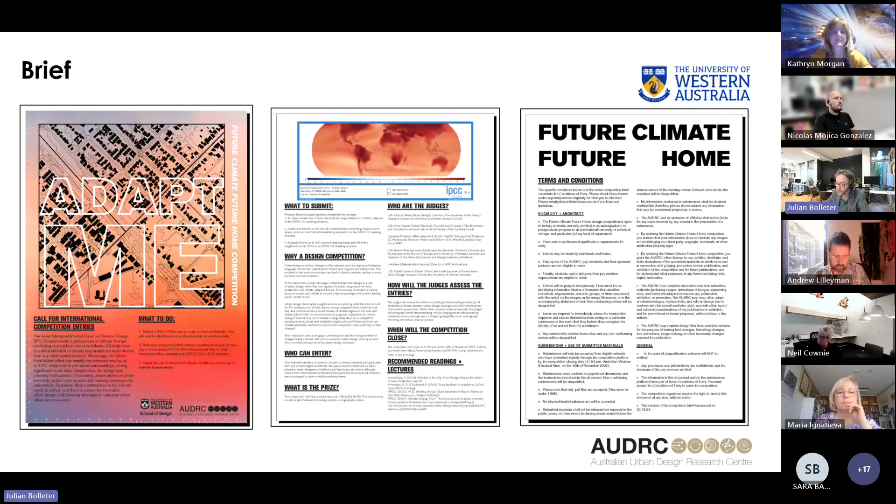So I will now walk you through the 10 commended entries, and then we will review the top 3 winning entries. The commended entries are in no particular order and will all receive a certificate.

Okay, so the first of the commended entries, congratulations to Francesca Montella, Maria Petrold, and Marco Santini from Italy and France for your commended entry. We know that topography can have major effects on urban climate, as cooler air tends to coalesce into lower-lying areas. With such thinking in mind, this novel and compelling entry proposed a constructed ravine carved into an urban space in Aix-en-Provence in France as part of a Mediterranean rewilding network. Congratulations to the team for their commended entry.

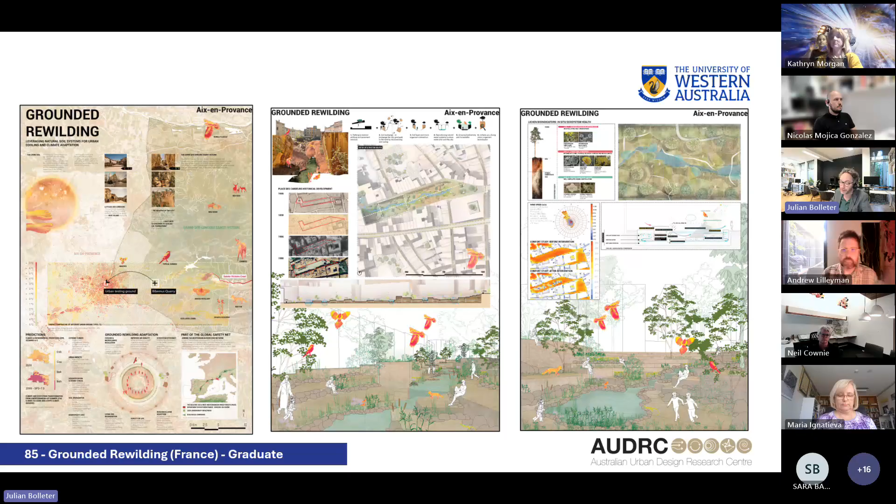Next is entry number 76, which concerns the Fahidi neighbourhood in Dubai, which was a student entry. There is much to be learnt from traditional Arabic Islamic urbanism about adaptation to extreme heat. This conscientious entry sought to adapt the Fahidi neighbourhood in Dubai through careful analysis of the existing condition and sensitively applied adaptation strategies such as blue-green corridors, shaded wind paths and cooling courtyards. Congratulations to Keith Vernon Castellina from India for your commended entry.

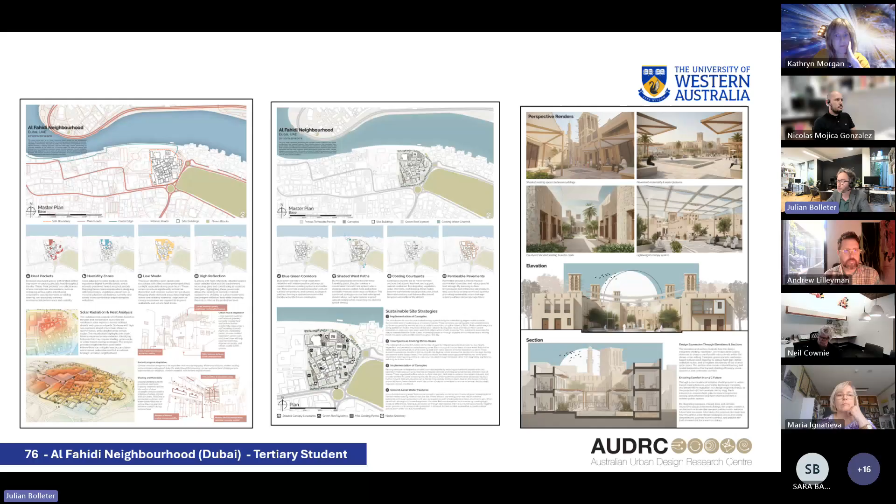Next was entry number 59, a graduate entry called Return of the Crows from Japan. Drawing on dystopian fiction, this evocative entry focused on the role of crows in seeding urban ruins with seeds to create an urban forest of epic proportions. The proposal reinterprets the role of crows to offer a radical new way of climate-adapted living in Kabukicho in Japan in 2099. Congratulations to Yutaro Takayuso, Daisuke Akadome, Mayuki Kondu, and Tukumi Murakami from Japan for your commended entry.

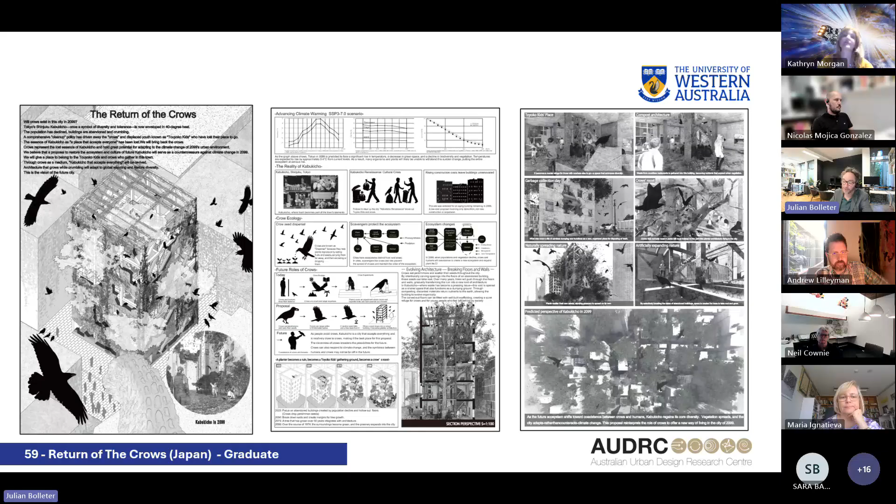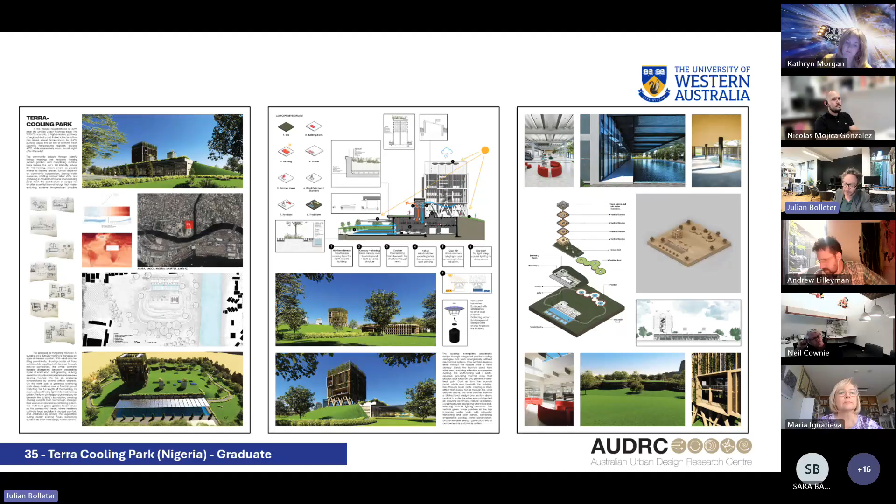Next, entry number 35 was about a Terra cooling park in Nigeria, a graduate entry. This elegant proposal for Lagos proposes a climate shelter within a park which stands as an oasis of thermal comfort within Lagos's suffocating urban heat island in 2099. The shelter features a prominent wind catcher which draws cooler air from outside while expelling hot interior air through natural convection. Congratulations to Mubarak Olawui from Nigeria for your commended entry.

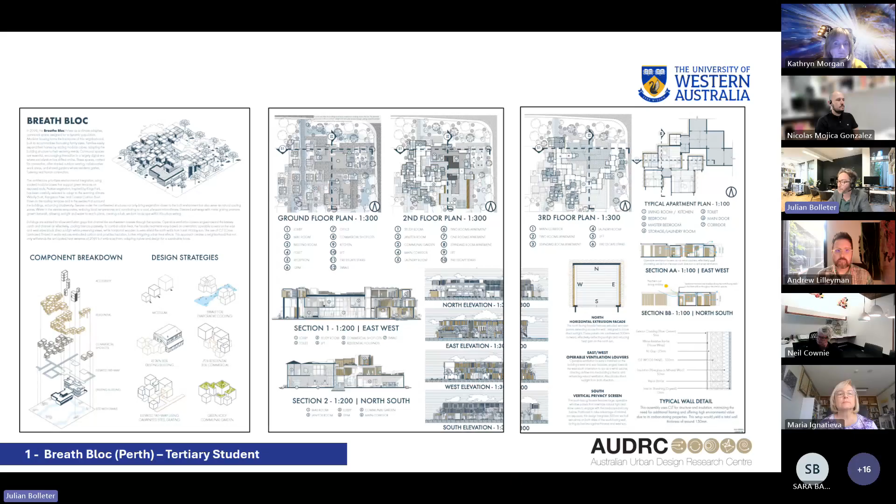Our next commended entry is called Breath Bloc, from Perth, Australia, a tertiary student entry. This extraordinarily detailed entry evokes the Breath Bloc, a climate-adapted community designed for a dynamic population. Modular housing forms the backbone of this neighbourhood and allows openings that channel the southwesterly sea breeze through communal spaces and into private dwellings. The result is a neighbourhood that breathes. Congratulations to Adrian Nya from Malaysia for your commended entry.

Moving through our commended entries, entry number 42, referred to as the Scavenger Grid, from Barcelona, a tertiary student entry. This visually striking and conceptually bold entry describes a climate-ravaged Barcelona in 2099, where the apartment buildings of Cerda's grid mutate from homes into survival machines. Congratulations to Erim Eshu from Turkey for your commended entry.

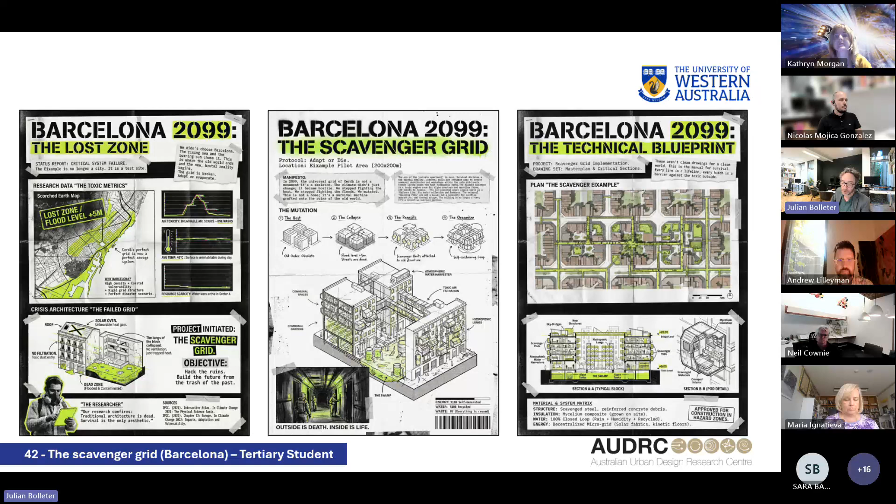Next is entry number 26, concerning Erbil in Iraq, an ancient city. This evocative entry focused on the ancient city of Erbil restores the ecological and cultural roles of currently dry seasonal water channels through water recycling. The result enriches the citadel with water and life while fostering a renewed sense of identity. Congratulations to Sara Bala and Joel Tanzi from Iraq for your commended entry.

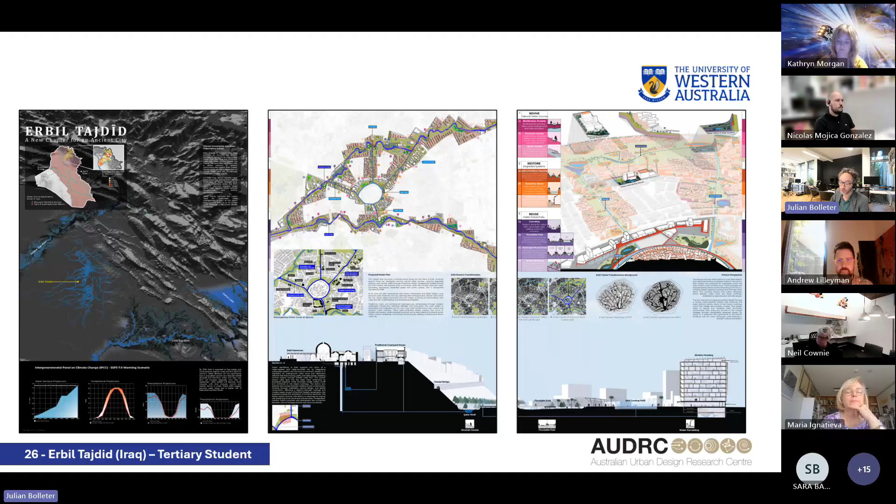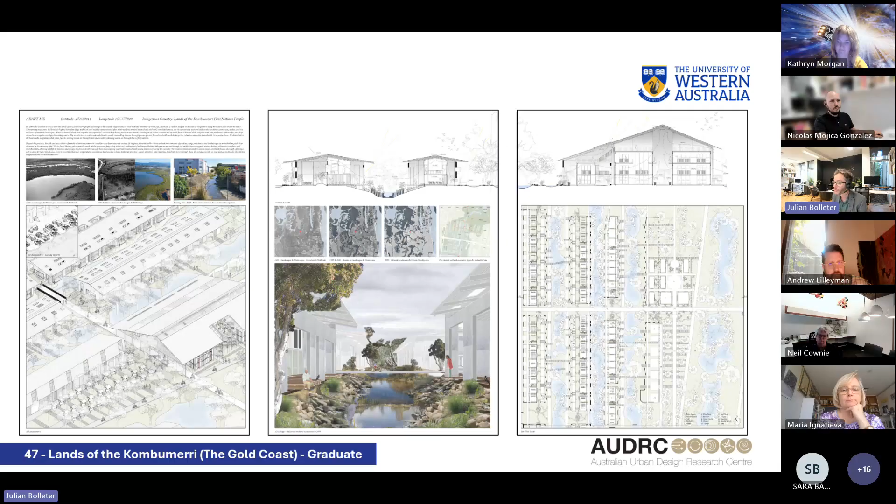One of the last of our commended entries, number 47, from the Gold Coast, lands of the Kombumerri people, a graduate entry. This beguiling entry from Queensland, Australia, explores the transformation of barren stormwater drains into cooling wetlands within a mosaic of wetland plant species, shimmering water bodies, and medium density housing. Congratulations to Thomas Collins and Kelly Norche from Australia for your commended entry.

Back to Japan, entry number 27, Back to the Forest, a tertiary student entry. This beautifully illustrated entry sets out a degrowth-influenced process for Japanese cities to transform into forest cities by 2099. Congratulations to Yuya Ota, Ayani Makami, and Kira Nishitani from Japan for your commended entry.

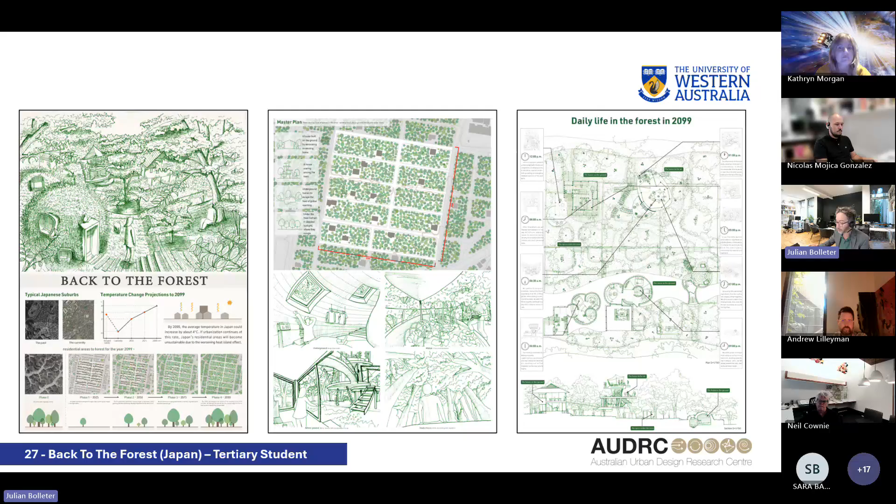The last of the commendations is the Building Block, a proposal and entry for Perth, and it's a tertiary student entry. This alarmingly professional entry documents a real and grounded project that takes into account planning constraints, local context, future growth, and climate scenarios with technical climate solutions that are simple, affordable, and deliverable. Our congratulations to Rilo Satiniano from Indonesia for your commended entry.

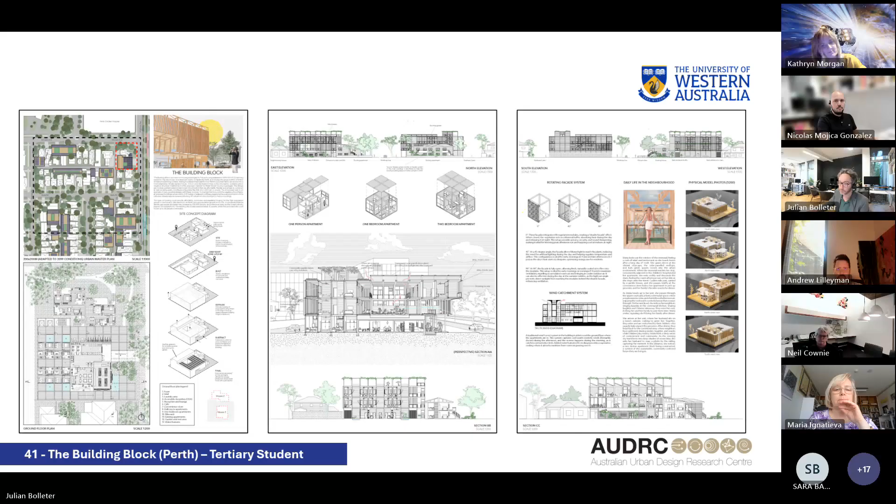Thank you and congratulations to all the commended entries. There were 10 of them. Now we'll proceed to announce the winners, starting with third place, second place, and then the overall winning entry.

In third place was Phong Nam Village, a Vietnamese village precinct project completed by a graduate in Vietnam. This compelling entry documents a master plan for Phong Nam Village that combines impressive technical modelling through ENVI-met with detailed climate adaptation strategies appropriate and deliverable within the context of vernacular housing. The judges were impressed by the extraordinary level of detail and conscientiousness in this distinctly village and Vietnamese project. Congratulations to Nguyen Hoang Quan from Vietnam for your third place entry.

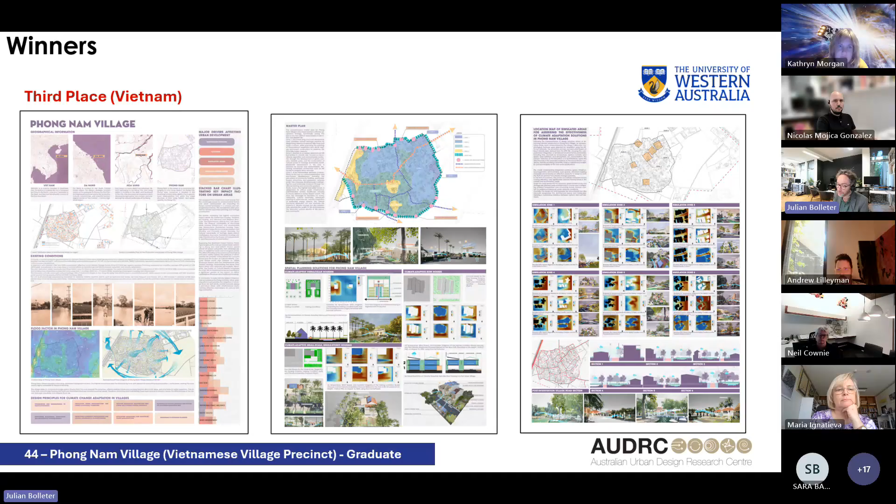Second place was project entry number 34, called Wind 2099, set in Guangzhou, completed by tertiary students. This exceptionally well-resolved entry documents an urban precinct in Guangzhou that integrates a wind-assisted mist system comprising misting infrastructure, which absorbs sensible heat via evaporation, and a fan system responsible for transporting cooled air into the precinct. Rather than drifting into fantasy, these climate solutions proposed are grounded in real technology and even prototypes. Congratulations to Kailin Zheng and Yuxi Zhang from China for your second placed entry.